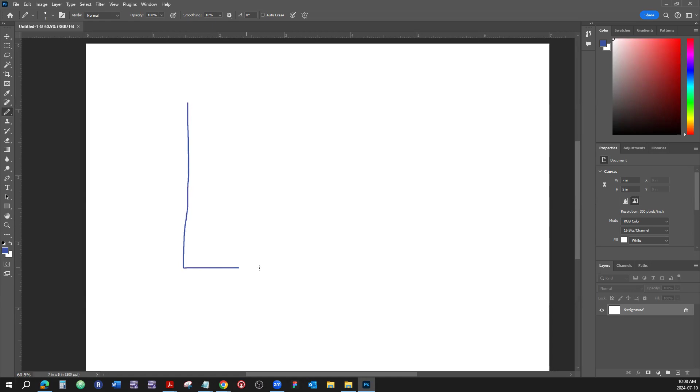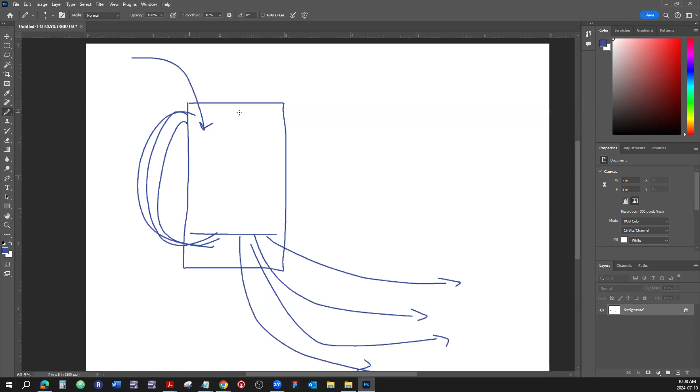So just for this lab, what's the main idea? The main idea of this lab is that we do have some sort of a connection field. We do have a feeder cable. We do have whatever amount - we're just going to get two, but I can just do field wiring. And then we have the cross-connecting things that we're going to do to connect whatever comes from the feeding, from the feeder cable, to the field wiring in an appropriate way. So that's the main idea. How is it that we're going to do it? Okay.

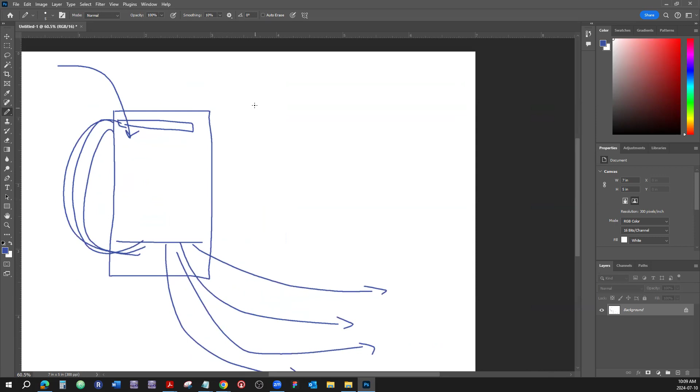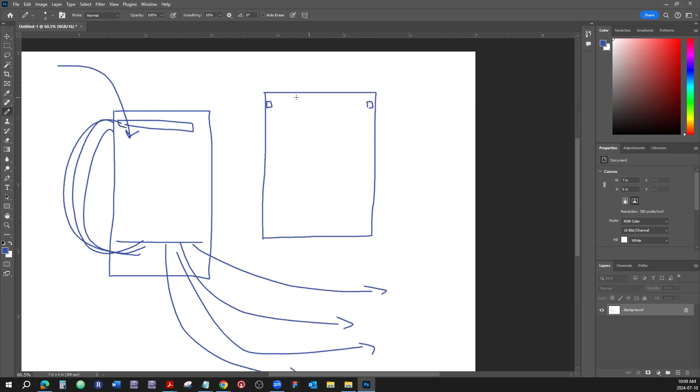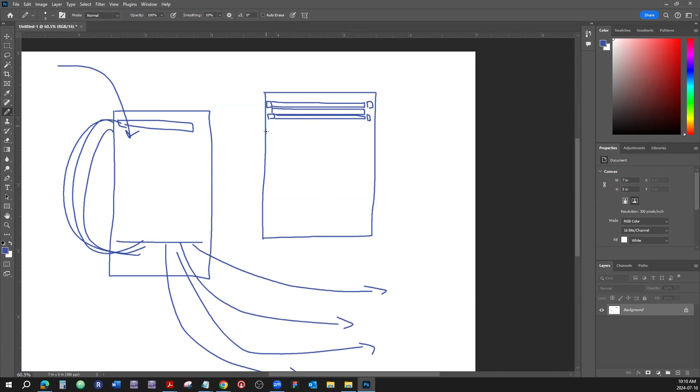All right, let's say we have a BIX frame. Just a reminder, how is it that the BIX frame is organized? Let's say this is a 10 position BIX frame. It does have brackets - there's one bracket here to connect one connector, here's another bracket to snap on with another connector. And here is a space right here - here's a space for the labeling strip. And then this here thing - let me see if I can do this quickly here - this is repeated 5 times. All right.

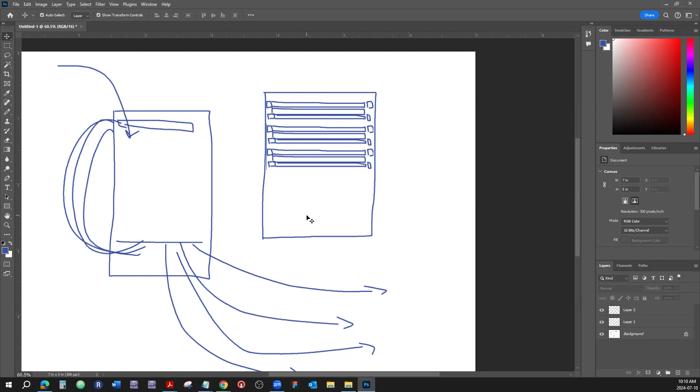Here's another pair of connectors, and another pair, and so on. 1, 2, 3, 4, 5 pairs, like that. That gives you a 10 position frame.

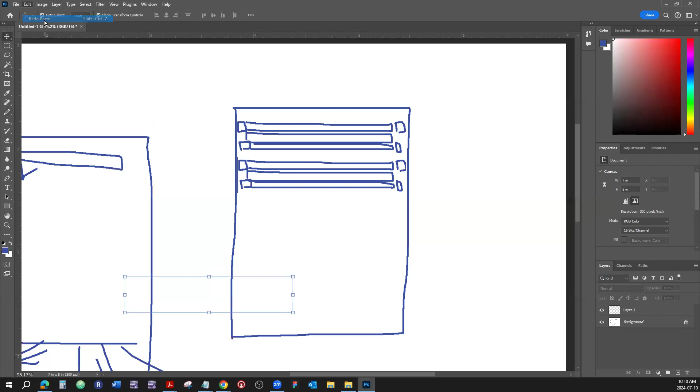Over here, there is a space, an empty space between the pairs of connectors. Also, what we have is a break in the bracketing, if I can call it that way.

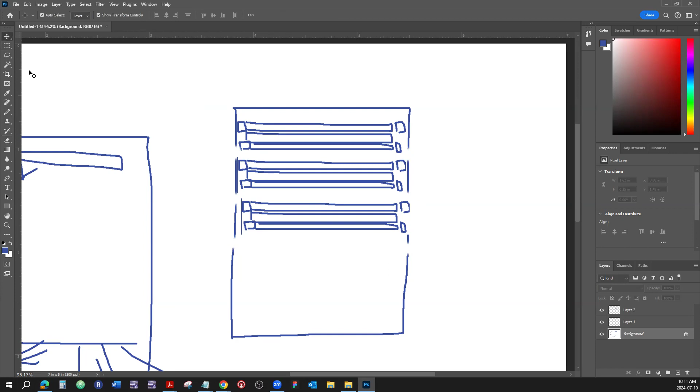There's a break here, and a break here, and a break here, and so on. So let's say you have the last pair of connectors.

And let's make another break. There's another break, and there's another break. So the wires can be routed through those breaks right here. Now, the wiring from or to... one more break.

The wiring from or to this connector, where that is housing a bunch of pairs, the wiring to this connector is being brought through this little slot.

All right, and then all the wires come from the other side. Usually we pick a side and stick to it, because if you bring the wiring from both sides, and you have to take this connector out and maybe put it in a different slot or manipulate it in any way or flip it around so you can work on it, then if the wiring is brought from both sides, it's going to be hard to do. So you either bring the wiring from this side or from that side and just stick to it.

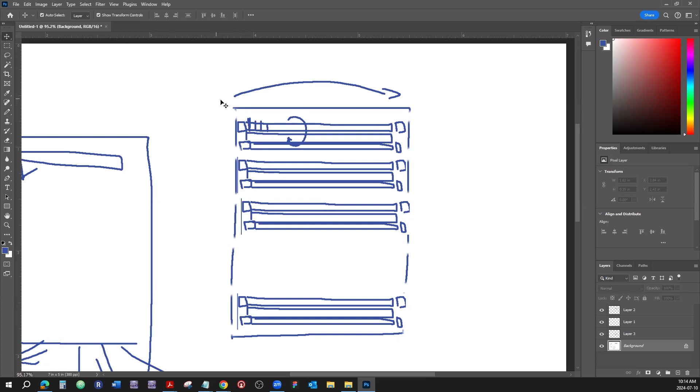Another thing I need to point out is this is the way that this whole frame is going to be positioned, fastened, permanently mounted to a wall, or a plywood on the wall. So please work on it as if it was so.

I notice people flipping it around, working it upside down, starting from this side, and then when you start flipping it around and rotating it to no end, you're going to lose the whole spatial orientation when it comes to working on this piece of equipment. Then you won't know which way is up and down, and by that you're going to lose the whole concept of what's going on and why you're actually here doing this.

So position this frame the way it would be if it were mounted on the wall, and work on it that way. Pair 1 is here, pair 2, pair 3, and so on, until pair 25.

Now, we're not mounting the 25 pair cable on these BIX connectors during this lab. We're mounting a bunch of Cat5e cables that are not going to be used as Cat5e, but we're going to use them as phone cables.

Now try to find a phone cable, a box of phone cable—you're probably going to have a hard time doing it. So even if we're doing conventional phone systems, which sometimes we still do, and sometimes we add on to existing systems, we just use Cat5e cable because it's cheap enough, or the price is reasonable enough.

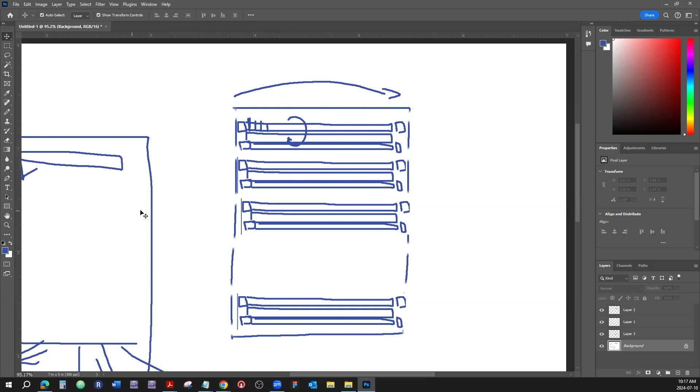We have established that we need to work on it. Look at it this way: this way is up, this way is down. We bring the cables from the top, that's the feeder cable. We run the field cabling from the bottom one, and we're going to mount a telephone jack on one and a telephone jack on the other one.

So here's the idea. When all said and done, when the whole job is complete, there is going to be wiring that is brought to the BIX connector, or any other kind of connector, but we're working with BIX in this lab. Think about it, it's nice and neat if, after the BIX frame is flipped around, the terminated positions are at the rear of this connector.

The cross-connect points that we're going to use are at the front. So it makes sense, for neatness and aesthetics, that after the connector is flipped, the wire is between the pair of connectors. Here's a pair of connectors, separated by a label or designation strip. Here's another, and here's another. There's five of those pairs on a 10 position BIX frame.

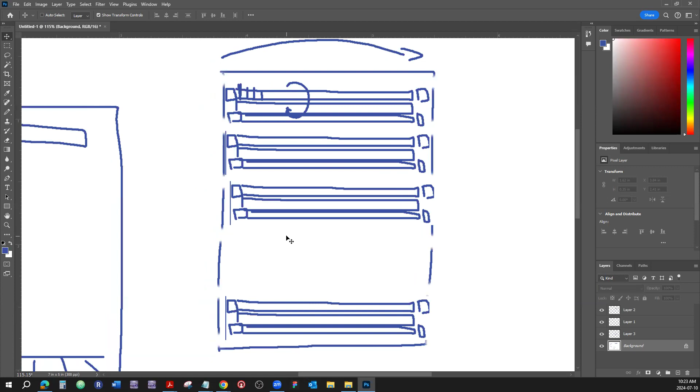When you are working on those frames, position them in a way that they will be hanging on the wall, right side up, and work on them that way. Have that thing in front of you in that positioning. Do not flip it around because it's closer here and you think you're going to be clever. No, don't try to be clever. Well, you are clever to begin with, all right.

So just don't lose yourself in the spatial orientation. Don't lose the concept of things. There's a reason why we're not just going through the motions here, and hopefully in other subjects, as you know, that's the same case.

There is no video on this lab. This is an in-class live demonstration. So pay attention, pay close attention. I went sort of fast the other day, yesterday, going quickly demonstrating, but I was explaining every little detail I was doing.

So develop a habit of listening and paying close attention to what I'm doing, which I noticed most of us did, to the point that you guys were leaning over and looking over my shoulder, paying extra attention because you want to do this thing properly. Good. All right, very good.

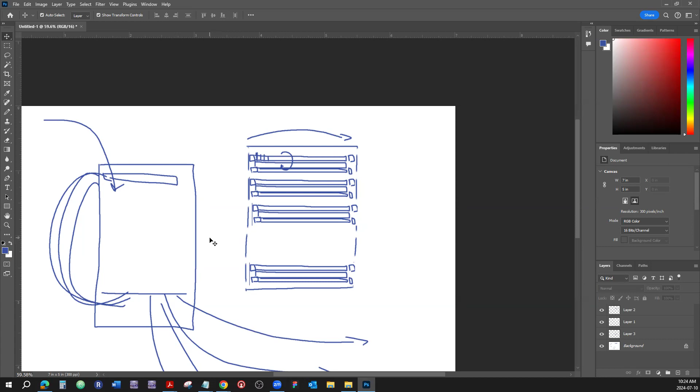Don't stop doing that. The only thing is I'm not going to mention every little thing when I'm explaining this, because I don't want to use more minutes than we have to on explaining things. I want you to have the maximum amount of time possible so you could do this job yourself.

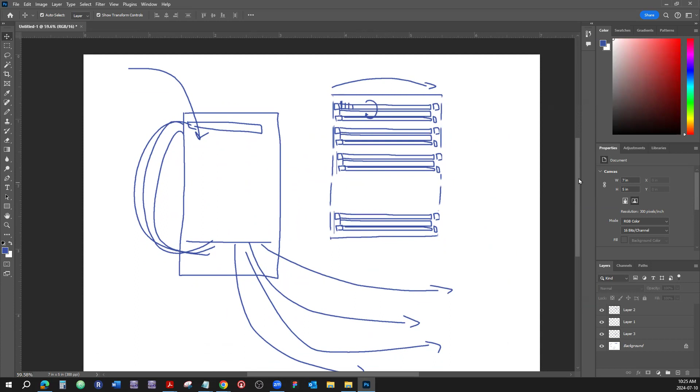The more you do it hands-on, the more you're learning. So when I'm explaining things, please don't look at the ceiling tile or think about what restaurant you're going to take a girlfriend or boyfriend to. Concentrate. Okay, so that's as far as the lab thing.

Now, since we have a little bit more time, I'm going to start on next week's streak of topics. Well, this concept is a never-ending thing. I could be talking about it for a whole week straight and never cover the whole thing, so we got some extra time doing that. Great.

Now, please use the next class - that is going to be designated time for writing the test. Even though the test is online, that's the designated time for that. So there will be no new concept, no new lecture material. I will be in that class in case somebody wants to talk about anything, to clarify things. The only thing I'm not going to be able to answer is questions that have to do with anything on the test, because you got to make that fair.

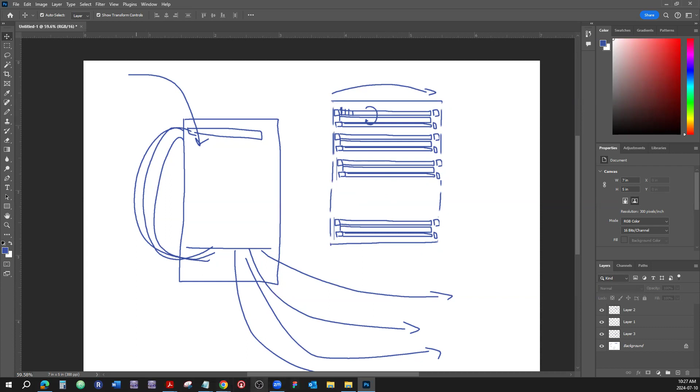But anything else, if you have questions about any of the labs or any theory content, I'll be there - 15 minutes. If nobody shows up during the 15 minutes, the class is over. So no new class content. What is it, I think it's Friday, right, that we have it. Okay, so next thing - where do we have that? There we go, all right.

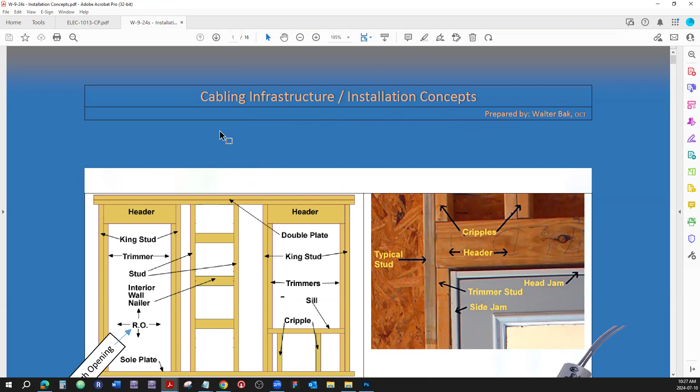Cabling, infrastructure, installation concepts, prepared by the one and only. All right, Control L I think it is, to get the full screen. All right, what are we getting into?

Yes, you're going to have to, in this business, you will never stop learning. That's the beauty of it, right? Because the monotony doesn't exist - forget it. It's always going to be interesting. You're always going to learn about new equipment, new procedures, new cabling techniques, new mounts, new everything, but also a lot of the basic concepts do remain, because a wall is a wall, right?

It goes up and down, left and right. A ceiling is horizontal, a floor is horizontal. It's just sometimes how things are being arranged. It's good to know the basic stuff, and the purpose of that is efficiency, right? So you can do things efficiently and properly and safely. Safety first, yeah, okay.

Now, here's a typical timber construction type that you could find in mostly residential settings. Now, when it comes to commercial, depends where you are. When I was here in Ontario, looking at things in Ontario, mostly you're going to - or southwestern Ontario, that was where we are - mostly you're going to...

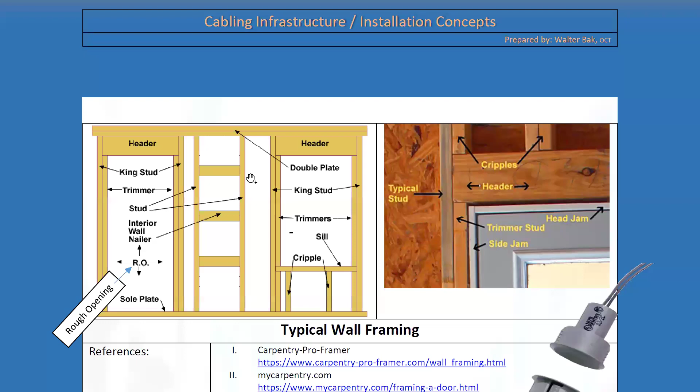Now, when it comes to timber structure, here's a typical wall that has most of the elements you can encounter. You're going to have the top plate, and the bottom plate or sole plate. On the sole plate and top plate, you're going to have some headers. You're going to have some studs. Like this is a door, so the door is going to have a header. You're going to have the king studs, or you just call them studs. And there's going to be some trimming, maybe some other 2x4s.

By the way, a 2x4 is not actually a 2x4. It's called 2x4 because it's supposed to have 2 inches across and 4 inches deep, but I'll let you find out the exact dimensions—it's close to 2x4. That's why they call them 2x4s, because it's easier to call it that.

So this will be a typical door setting. Now here's some more studs. And here are those interior wall nailers, to put up the drywall. Mostly you can find those, and sometimes they'll be called nogging, a little bit different. They'll be 2x4s flipped the other way. But you're going to have some form of horizontal structure, which is good for the structural concept, the physical structure.

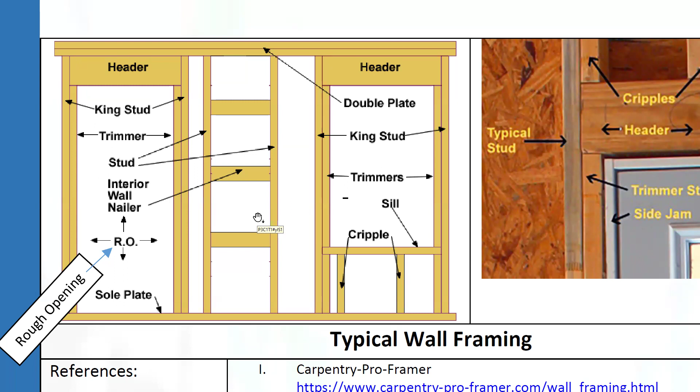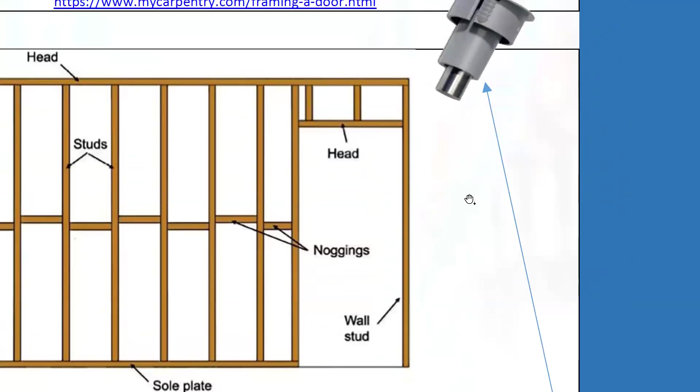For example, if you want to run a security contact, which looks like this, this is called a flush mount security contact, or typically known as a door contact, DC. Nothing to do with the DC type of power. DC stands for... well, you'll be able to look that up. And if you want to get into it, as I always say, talk to me.

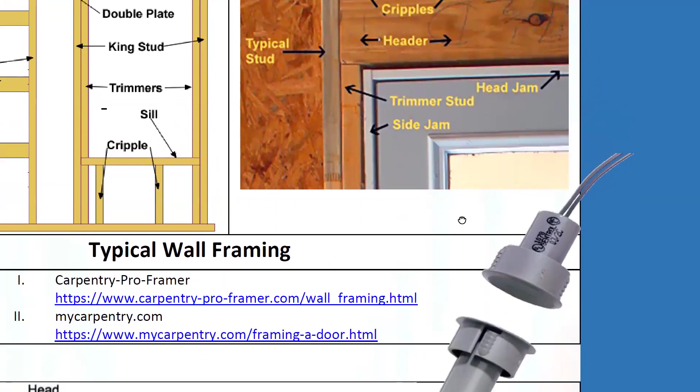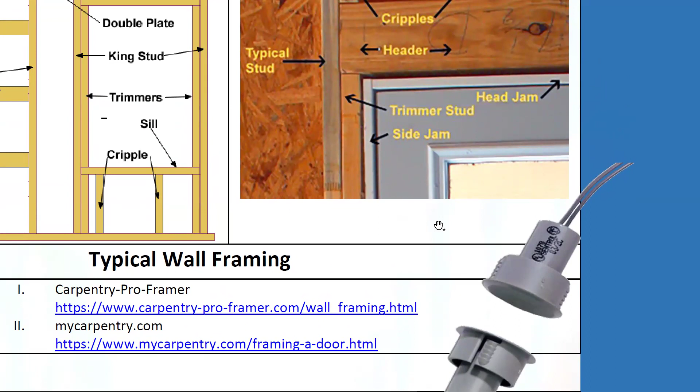So if you want to install one of those flush as opposed to surface mount contacts, the flush contact we are able to install inside the door frame. So here is the wired part. You drill a hole in the frame, and that thing goes in the door frame, and the wire comes up to the top, and it's connected to the wire that runs to the security alarm panel.

Of course, it is so much easier before the drywall is installed because you have access to this space, you have access to this space here, you have access to drill a hole that goes between this trimming, or these, well, these are called the cripples, right? Or generally speaking, between this piece of 2x4 and this piece of 2x4, so you can run your wire and route it further.

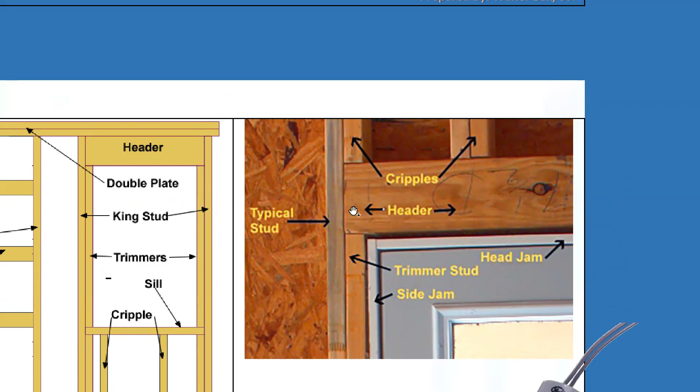Or if you want to drill a hole between these two, now this header, that's something else. Sometimes it's just a solid piece of wood or a combination thereof, and there is no space anywhere. Sometimes you really have to get a long drill bit, thick enough to be able to thread a wire. That's why the security alarm wires are a little bit narrower or not as thick, so you can run that.

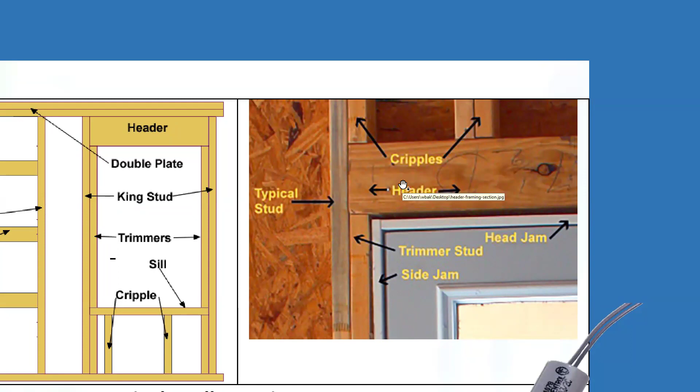Can you imagine trying to drill that and not make a mess after the drywall is installed? I've had situations where people ask me, can you install an alarm system? Yeah. So I walk in there and my basic question is, when is the next time you're planning on painting your house? Why? Because sometimes I will have to disturb a little bit of drywall here, knock a wall so I can put my drill bit and drill things. So things might have to be patched up after I'm done. Oh, we just painted the house. Okay, now you call me.

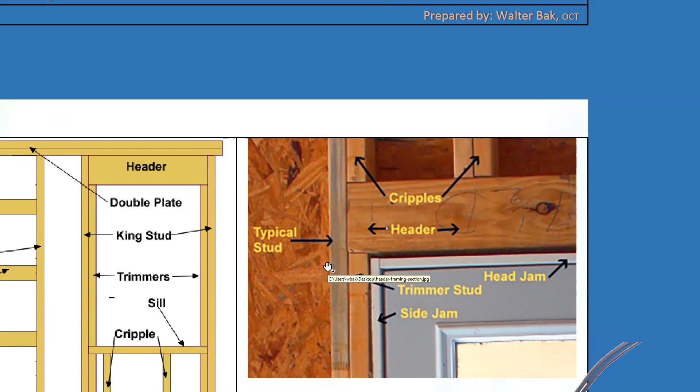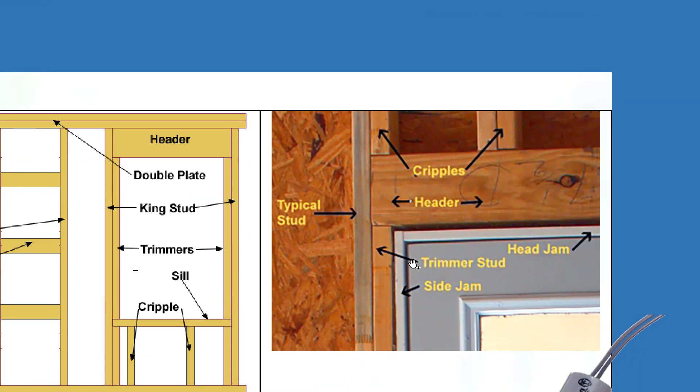I have such situations. Then what do you do? Well, you install something called wireless door contacts. So there's no wiring involved, just batteries, and there's a radio transmitter and receiver in the contact that transmits signals to the panel, which has a wireless receiver. They are more expensive. If you buy these contacts in a bag, one of those wired contacts might cost you $1.50, maybe $2 per contact, maybe $3 now. The wireless door contact might cost you $75, $85, $90, depending on where you buy it and what type of contact it is. And how many doors do you have? How many windows do you have?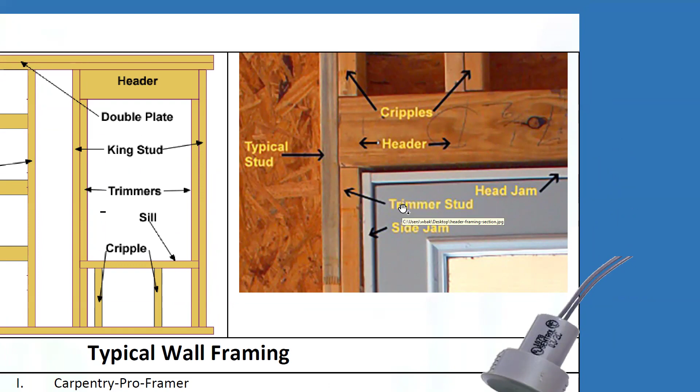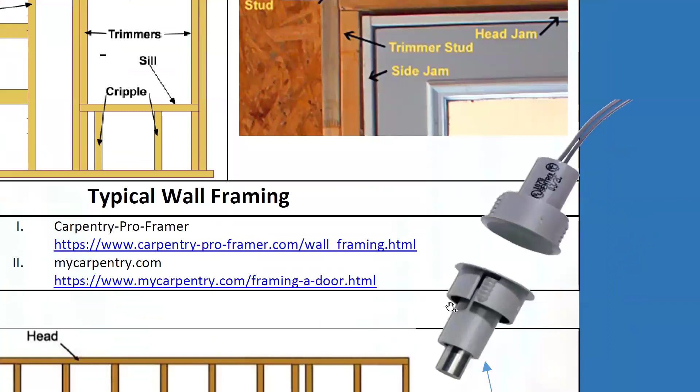It adds up. But just so you know, people have to understand that just because this little part costs, let's say, $3, you still have to run a wire to it. And the cost of running the wire is time. So this doesn't cost you just $3, it costs you this $3 plus the cost of the wire, which is sometimes more significant than others. And the most significant cost of that is your time to drill the hole, route it, mount it properly, and run it. So some of the prices are going to be more or less the same, whether you're installing this type of wired contact and spend the time running the wire, or you have to pay more for the wireless contact and not spend the time running the wire.

It balances out to pretty much almost the same.

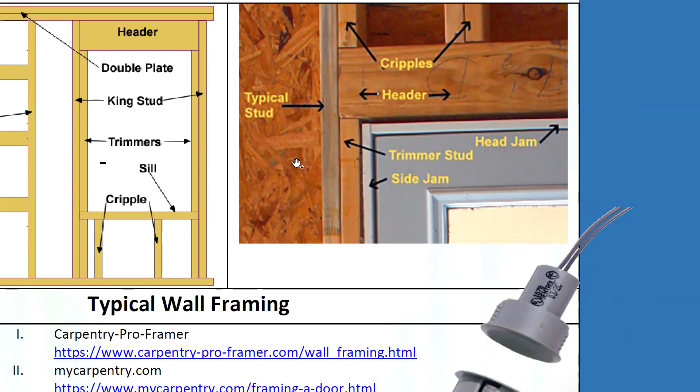Here's the thing when you're selling your services: as much as possible, try to explain to the client so they don't feel they're being taken advantage of. There's nothing worse than making a client think that. That's how you lose business. But let me not digress too much—it is important though.

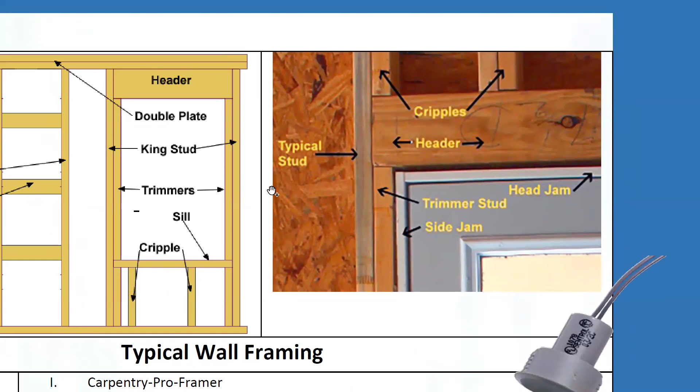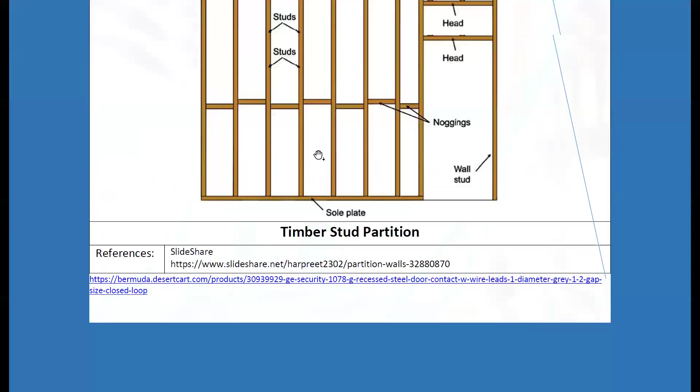Okay, so out of this slide, just zoom out. Can I zoom out? I'm getting here. All right, so...

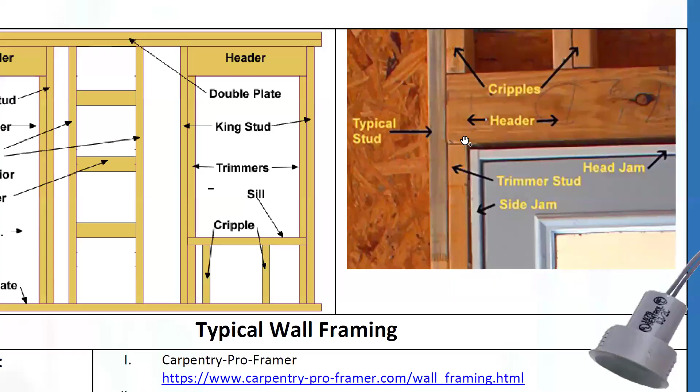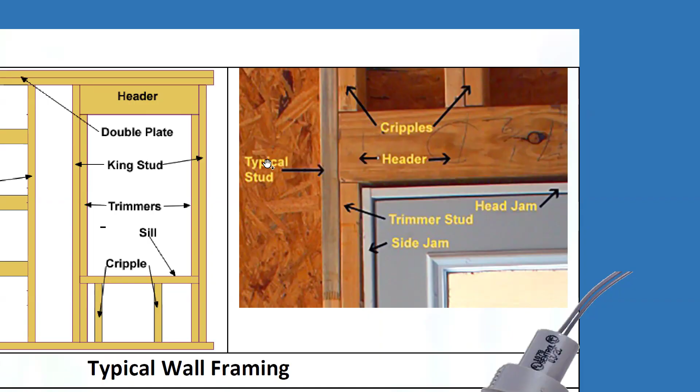I'm not going to ask you to remember this by memory. I might ask you on a test, what do you call this? What do you call that? What's important when it comes to... Look how thick in timber this is here. It's significant—you have to spend a significant amount of energy to install things when the drywall is not there.

I'm not going to ask you to remember it by memory, although if you work in the business long enough, you'll remember that terminology. Regardless, as the cable installer, we don't need to know the exact proper technical term—that this is a king stud and this is a trimmer. We just need to know this is what we have to go through in order to run a wire. And that's what's happening here.

Now, when it comes to commercial settings, steel framing as opposed to timber framing—things are not packed as much. So in the timber setting, you're going to see a lot of horizontals. In steel, you're going to see a lot of empty spaces.

So you could actually drop your wire all the way from the top, and just pick and choose the location for a switch or jack or connector, and make an opening in the drywall if it's installed. You have that hollow space—you just drop the wire and use a typical coat hanger type of hook. And if your hands are small enough, you can stick a hand in there and grab the wire.

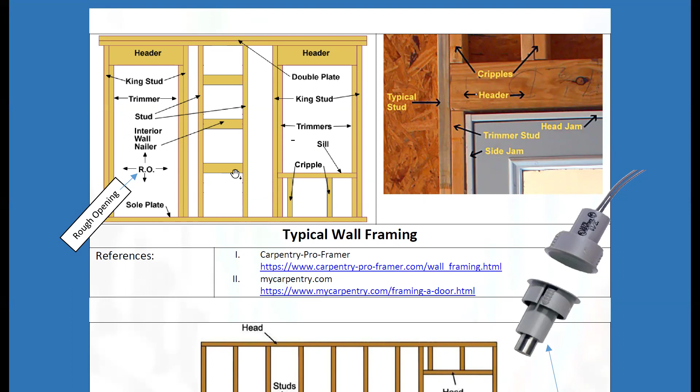Sometimes it's difficult to get to because there's other furniture over there. So just so you know, if you drill a hole here to put a jack a foot above the floor, and then you can only poke your wire-pulling stick up to a certain point because something is stopping it—because it's a horizontal—what do you do now? Patch the hole, put a blank faceplate. Just so you know what you're getting into, try to be predictable when it comes to doing things.

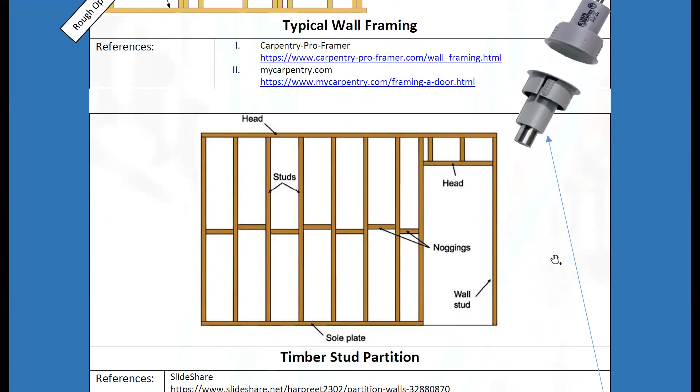Now here's another typical structure behind the drywall. You've got the header, the head plate, the sole plate, the studs, and the horizontals—these are called noggings, just for proper spacing since it's timber. With steel framing, most of the time you're not going to encounter those horizontals.

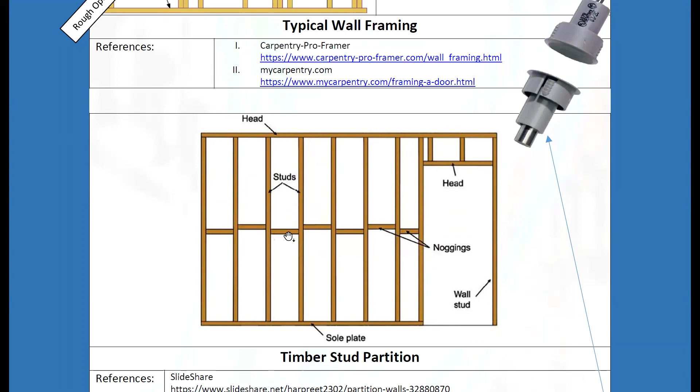All right, what else do we have to deal with? Another thing is insulation. Here's what noggings are, so you can read that—you know how to read, right?

Another thing is insulation. You have a wall—let's say exterior wall or interior wall. Do we install insulation on exterior walls? Yes, to conserve energy, to prevent heat from escaping in the winter and to prevent heat from getting inside in the summer, here in southern Ontario. If there are places where the seasons are different, things could be different, but I'm talking about what we have here.

So do we need insulation in the interior, on the interior walls? Both sides of the interior wall are inside, so do we need it? Yes, we do. It's a really good idea for sound separation, so if somebody is talking on the phone in their bedroom, the whole house doesn't have to hear it, because maybe somebody else wants to watch TV in the living room.